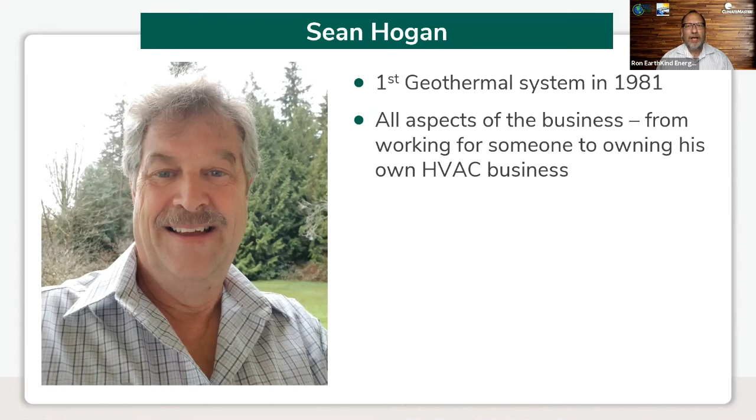Tonight, we're going to be joined by two special guests. One is Sean Hogan. Sean had one of the first geothermal systems installed in 1981. He's been involved with all aspects of the business, so you could try to stump Sean tonight if you'd be so kind with your questions in the chat function. And he's been a national trainer for ClimateMaster since 2008. He chairs the International Ground Source Heat Pump Association Training Committee, and he's a do it right or stay at home kind of guy.

In addition, tonight we have Rochester contractor Mike Seidenberg, or Eco Mike. He's been around for a long time. He's the owner of Eco Energy of New York LLC, and he services Rochester and pretty much all of Western New York from Syracuse to Buffalo. He's been a geothermal installer since 2006.

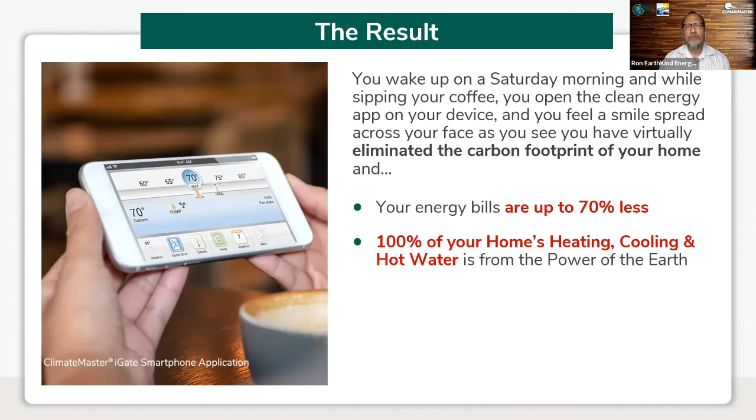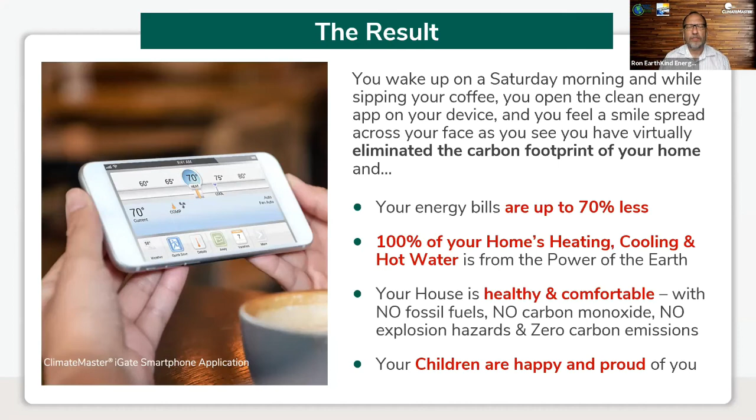You've got 100% of your home's heating, cooling, and hot water coming from the power of the earth, from the ground underneath your feet. Your house is healthy and comfortable. There's no fossil fuels, no carbon monoxide to worry about, no explosion hazards, and a zero carbon environmental footprint. And if you've got kids like I do, they're happy and proud to be associated with a family that is doing all these great things. All right, where's the proof?

So heat pumps, interesting concept, right? So everybody has a heat pump. Most of us don't realize that our refrigerator and our freezers are heat pumps. And that's because the compression and expansion cycle takes that heat out of the box and lets it go out in those coils in back or underneath that particular refrigerator or freezer.

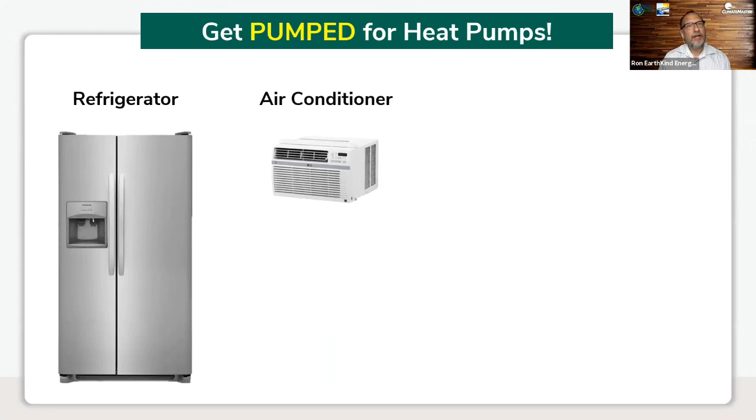We also have air conditioners. An air conditioner, whether it's one you put in your window or a central air conditioner, actually is a heat pump as well. And the only difference between an air conditioner and an air source heat pump is that an air conditioner only does this cycle during the summer, but an air source heat pump takes the same cycle, flips some valves, and takes the heat out of the air, does the compression and expansion, and then warms your home or your building during the winter.

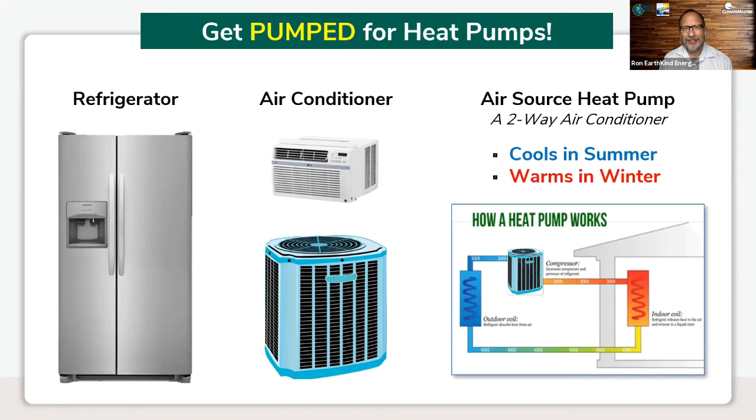And it's a compression and expansion cycle, and we can go into the technology if you'd like. So feel free to ask questions. And again, feel free to try to stump Mike and Sean. Okay, and at this, I'm going to pass it over to our guest presenter, Sean Hogan, if you would, sir.

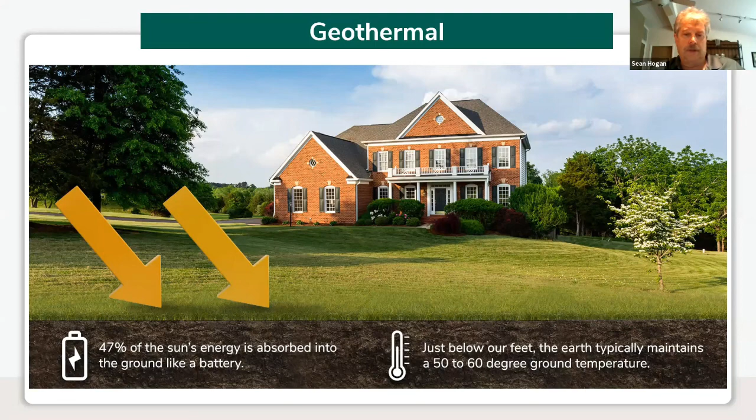So burying that pipe in whatever form it happens to take below the frost line gives you an even temperature in the winter, but also just like something we recently experienced where I live out here near the Seattle area is that when it gets blistering hot outside, your typical air source product, they struggle a bit. They lose capacity because they're trying to reject that hot indoor air into not very receptive hot outdoor air. So my heat pump just purred right along when I had 110 degrees here on Tuesday at my house, and my house was comfortable, and my bill is lovely.

So in the summertime, as you can see here, we're taking that heat out of the house and we're rejecting it into that tepid ground temperature. And up in the New York area, you're probably in the mid 50s, I would guess, low 50s, depending on your actual location. Similar out to where I live. So in the summertime, your efficiencies are very, very high because of that delta, that temperature difference from that cool ground to what you're trying to reject out of the home. So it's very receptive. It's extremely effective.

And the same in the winter. We're going to reverse that refrigerant cycle and we're going to draw that constant temperature. And a lot of people say, how in the world do you do that with 55 degree ground? And it's because of the refrigeration process. I won't get into that. That's more of a technical question when you sit down with someone that's going to design your system. But why is it an advantage?

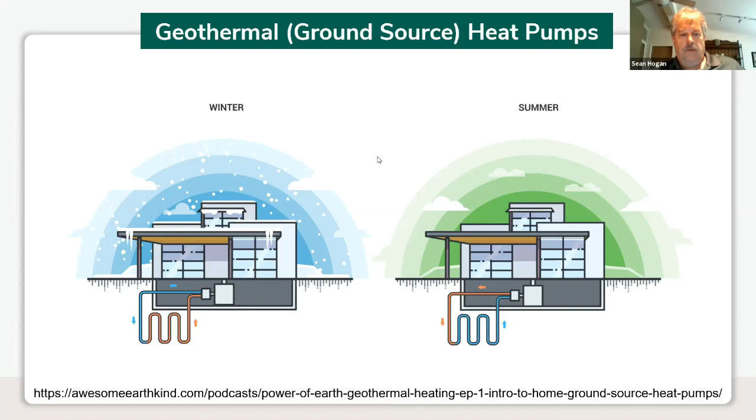Because that earth temperature doesn't tend to get much affected by what's going on outside. The other thing that I want to point out is that when you have your typical air source heat pumps, you have a unit that's sitting outside. They make noise. You're typically landscaping around them to make them go away, but also the most efficient they are is the day you put them in, because they're outside. They're going to start to degrade with dirt, leaves, pine needles over time. And if you're near the ocean, well, they really degrade because of the salt sea air.

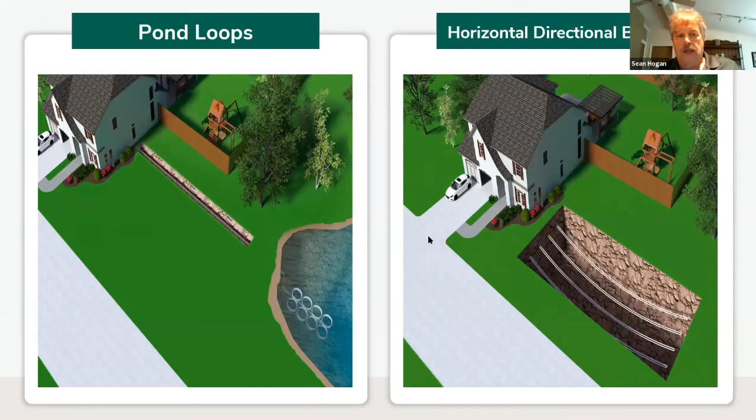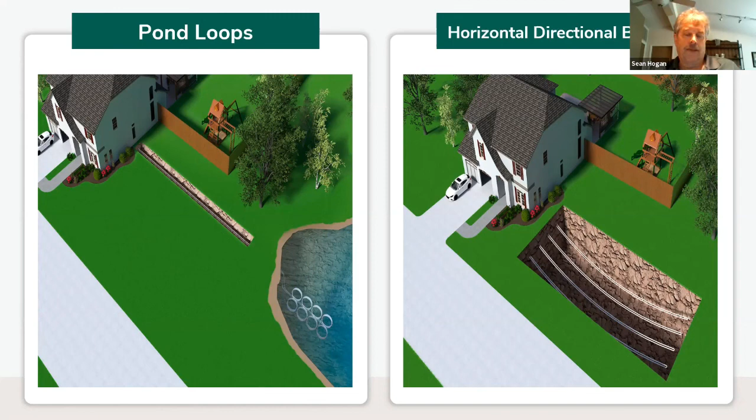So here's a couple of applications, and it doesn't matter which one you use. They all work the same if sized, designed, and installed properly. It all comes down to how much property do you have and what equipment is required. So you can do a horizontal trench system. You can do the vertical bore. If you happen to have access to a body of water that has the correct size and depth, that's outstanding for a geothermal heat pump. Or you can do what's called directional boring, which allows you to go underneath items that typically would mean that that area is not available for a typical trench ground loop. So that's a really nice method if that's what you have to utilize to get that loop field in.

Thank you so much, Sean.

One of the big advantages of geothermal as well is the fact that you can get a 26% tax credit on the total cost of your system. So when you take a look at the federal tax credits, always talk to your tax advisor, because everyone's situation is a little bit different. Talk to your tax advisor and confirm that you're able to take advantage of this. But if you pay federal taxes, you should be able to take 26%, a quarter of the system's cost, and write it off and get it back in a tax credit for a qualified geothermal heat pump cost. And that's not the same, by the way, for an air source. So it's one of the additional benefits that you get with a geothermal heat pump.

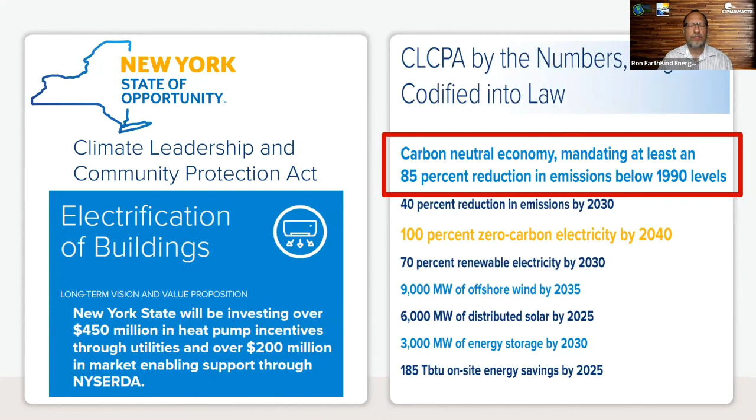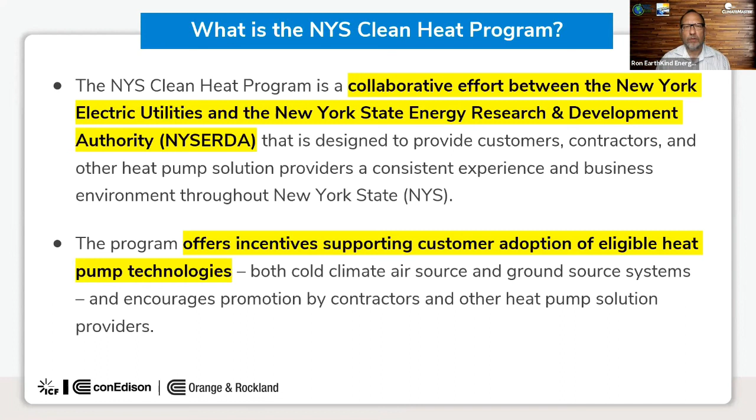In New York State, we have something called the Climate Leadership and Community Protection Act that got passed in 2019. And what that does is it basically starts to move towards electrifying all our buildings to get rid of all the fossil fuels that are around, so that we have a carbon neutral economy by 2050. And New York State is investing $450 million in heat pump incentives that are available to you to help make this technology change. And so, what is the Clean Heat Program from New York State? It's a collaborative effort, actually, between the utilities and the New York State Energy Research and Development Authority. And basically, it offers incentives to help write down the cost and make it much more affordable for you in the upfront cost, so that you can save more money over the long term. And in Rochester Gas and Electric, the average incentive for a home is $7,500.

But Eco Mike, if you would come on and tell them what you figured out today from your hard work to get RG&E to recognize some differences in the program. Well, on this one specific unit, the Trilogy, which does your heating, cooling, and domestic hot water, it actually maximizes the incentives. If you have a 5-ton unit, it'll get you over $10,000 in rebates. $10,000 right off the top, right, Mike? Right off the top. So that goes to you. Your homeowner never pays it, and then the homeowner just takes an additional 26% federal tax credit. So 10 grand off the top plus another 26%, and boy, makes it really affordable.

Thanks, Mike. Thank you. All right.

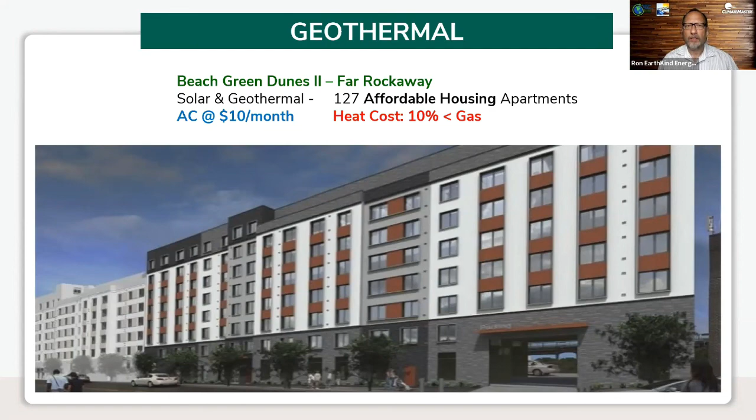So just to give you a sense, a lot of folks think this technology is just for homes, but this is one example of a multifamily building. There's a lot of examples of commercial buildings of all different sizes, but in this particular multifamily building, they combined solar, which is a great option when you can do it, with geothermal. And what happens with geothermal is that it's cheaper in this multifamily building than natural gas for heating, and it's dramatically cheaper for air conditioning. Some people in this area of the state are paying $100 a month for air conditioning for the same size units, and now it's down to $10 a month in this affordable housing complex down in the Rockaways. But the great thing about this technology is that it works no matter what kind of home you have.

If you have a small plot of land, if you have a ranch, if you have a McMansion, if you have a lot of land, no matter what type of property, what type of house you have, most likely you can use this technology to help you reduce your energy costs very substantially. We're going to talk exactly how much that's going to be.

But the wonderful thing is that before, you might have noticed prices going up again with oil and propane and other sources of energy. So you're getting shocking bills, rising energy rates, looking at 2,000 pounds of carbon, a ton of carbon per household per year is the average when we use fossil fuels. You have no control, or very little control over your energy future. If you're like me, your kids are getting worried about what's happening with the environment.

And the great part about doing these technologies is that you start to shock proof your bills so that your bills become controllable. You get up to a 70% reduction in your heating, hot water, and cooling costs. Zero carbon emissions coming from your heating system. So knocking down a ton of carbon per household per year. You feel like you're doing your part to make a difference, and your kids and your grandkids are proud of you.

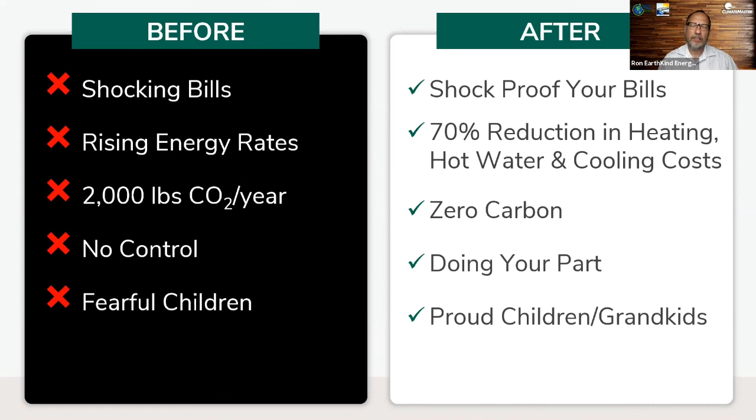And all that without having to figure it all out by yourself, to rely just on salespeople for information, to be unsure about what you're doing, to get lost in the technicalities, to be overwhelmed by the complexities, to not realize how you can save money with the incentives and the financing, or feel like you're leaving money on the table, or choosing the wrong technology and having to handle all these problems by yourself. So that at the end of the program, the simplest part is that you just choose your path and you have a positive impact and help save the planet.

All right, so now to the ClimateMaster Geothermal software system and why it's so important to have a system that optimizes your efficiency and makes sure that you know what you're getting and what you're getting into and how it compares to everything else. And at this point, I'm going to pass it back to Sean.

Yeah, thanks again, Ron. So ClimateMaster developed a GeoDesigner software system, and it truly is a tool as I look at it. I use it as much as a design tool as I do a diagnostic tool. I can go into troubled systems and model things, and I can kind of start to dig into, if there's an issue, what that might be, because, you know, they always blame the ground loop. I will tell you it's almost never the ground loop.

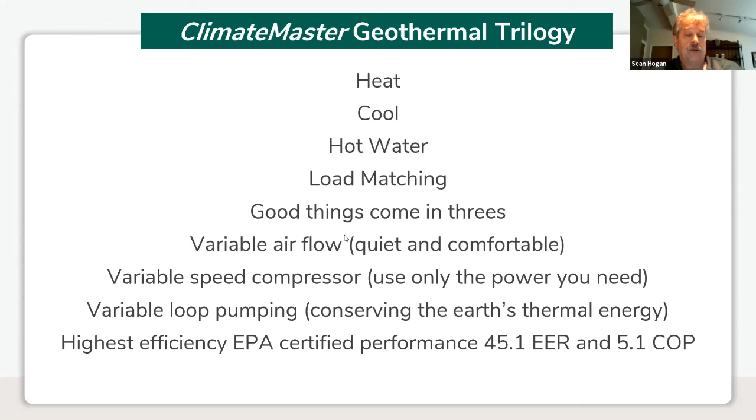I don't know if any of you were aware what the news was like out west, but I live out near Seattle, about an hour north and east of Seattle, and we had very, very high temperatures this week. Very, very unusual for us, especially in June. Well, my unit kept right up. I got calls, because I'm still in the HVAC business, of people that were struggling to maintain temperatures below 80 degrees in their home.

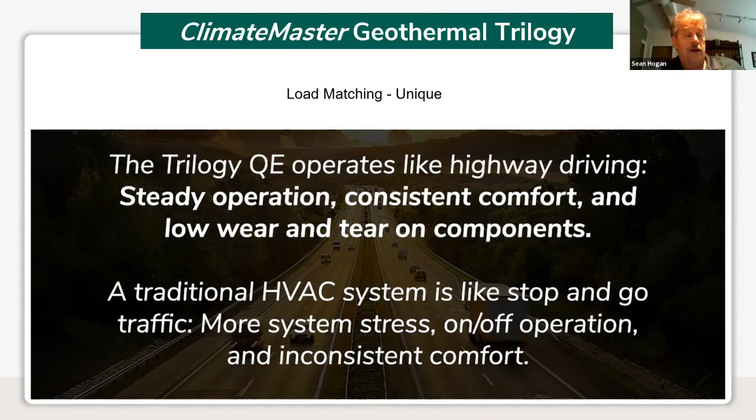Why is that? Well, their air conditioner, their heat pump, was trying to reject that heat out of their home into that hot outdoor air. It loses capacity. My geothermal heat pump was coupled with a bunch of pipe in my ground. Yeah, my ground loop temperature, the fluid in it, raised a little bit, but my efficiencies were still staggering. And my compressor ramped up to maintain that comfort, and it brought a little additional fan. So my unit ran a lot, like all of ours did out here.

But also what it did during that time is if I did much in the way of hot water usage, what the Trilogy unit does is it'll shut off that ground loop pump and no longer reject the heat in the ground, but it'll reject that heat into your hot water tank. So folks, that is either free cooling or free hot water, your choice. But I don't know about you, I like free. I already own it. So now it's paying me back in spades.

So it truly is making lemonade from lemons. So probably not a good analogy with a heat pump, but great unit. I really think that this is just a super product because, well, I've been living with it for 7 years, and all I do is I keep my filter clean.

So here's a couple of instances where the unit is sitting in a smaller space like a closet, mechanical room, and you can pipe it over to where the hot water tank is. Here's a garage installation. I've done quite a few of these where the heat pump is right next to the smart tank. Very clean, by the way. So here's the smart tank.

The smart tank is made for us. It's a highly, highly insulated tank. It has about 2.5 inches of foam insulation in every direction. That includes the top and the bottom. It's in 3 different sizes. It's custom designed to meet our needs. It communicates with the heat pump. So this isn't a system that just throws a little bit of free hot water in the tank while it's heating and cooling your home.

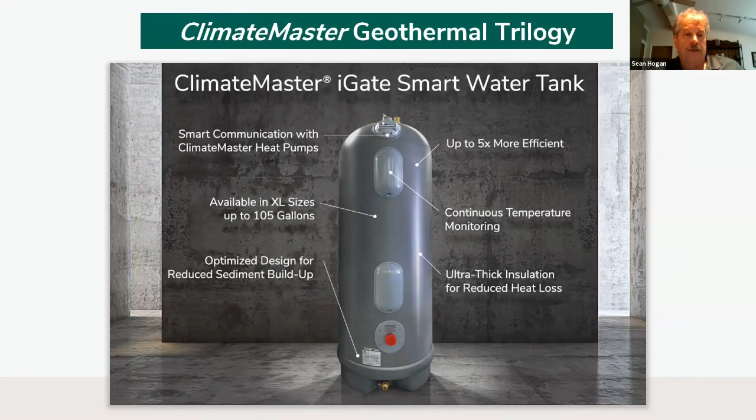The QE45 is going to react to the hot water tank. It's full on hot water production, does 100% of your hot water. I have actually never turned the backup elements on in my tank in 7 years. So it's a super system. It does a terrific job at high efficiencies. And during power outages, sometimes I'm without power out where I live 2 to 3 days. When the power comes back on, I lost maybe 3 degrees in that tank. It's just a thermos bottle beyond measure.

It's amazing. We also have a proprietary control system, and we're about to take a quantum leap to another, even more improved. But this is state of the art. So this is all Wi-Fi based. There's apps for the homeowner as well as the contractor, both for the computer but also the smartphone. It's a Wi-Fi enabled thermostat. The homeowner can actually change the temperatures remotely via the thermostat.

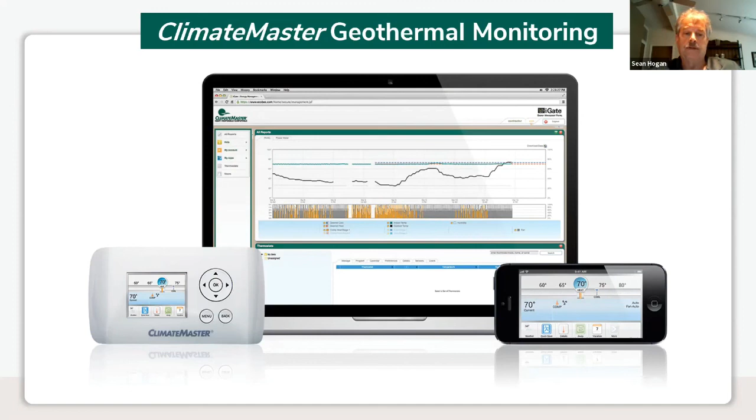I will say this right up front, folks, please don't use setback with your geothermal heat pumps. You won't save a penny. In fact, it'll cost you. So I keep mine set 24/7 and I don't touch it, because that maximizes the savings.

So here's some of the application. I think you saw this a little bit earlier. One of the things that was talked about briefly by me is that you don't have units sitting outside in the elements. You're not trying to disguise the noise. You're not trying to limit the distance away from the windows and those locations. It also means that if there's any service needing to be done at the heat pump, well, that's all done inside the home, whether it's in that mechanical room or garage. It's very easy. It's very compact.

I will tell you that all I do with my geothermal heat pump, I just keep the filter clean. There's nothing to oil. There's not a lot to do. They truly are the least cost and longest lived heat pump out there. Folks, I have geothermal heat pumps that I installed over 30 years ago out there and just motoring along just fine. Not many can say that about unitary outdoor air source product, whether it's air conditioners or heat pumps.

So getting into the software, number one is you want to analyze. Number two is plan. And then execute. One of the most crucial parts about the beginning of any HVAC system is: is this home a heat pump candidate? In other words, will it retain the comfort? Guys, if the wind blows outside and your curtains move inside, you may not be a heat pump candidate. You may want to address those issues before you take this step into the next energy saving component into your home. So it all starts with a load calculation, and this is critical.

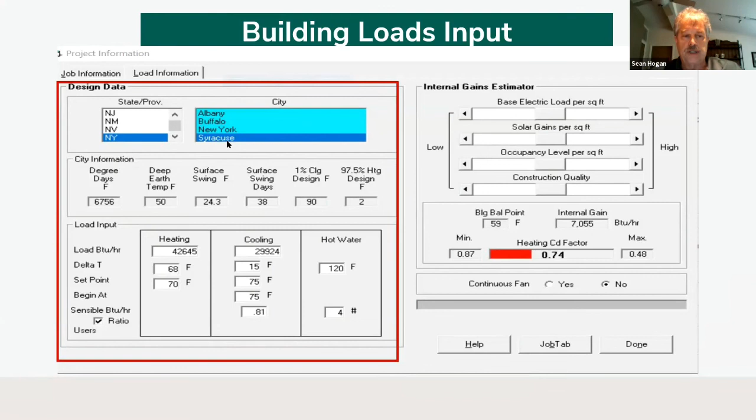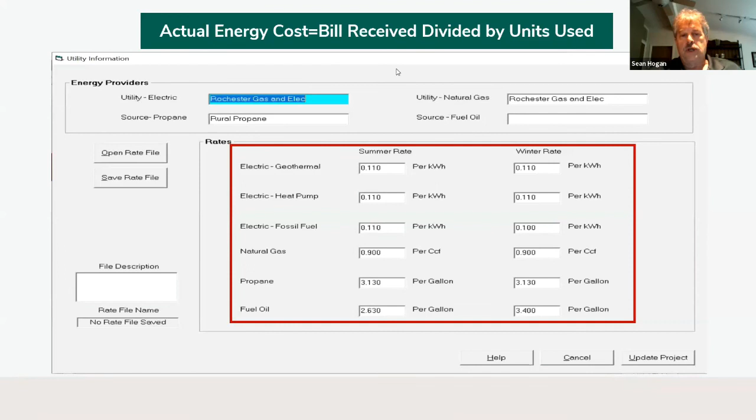It's not a rule of thumb. It's not how many square feet do you have. It's measurements of the home, the windows, the doors, the insulation values for your weather city. And then the contractor will put all of that into the software, that load calculation. Also, the contractor, EcoMike, for example, will have the ability to create a rate file. This is where you can determine what the fuel costs and electricity costs, and if they change summer to winter, you can put those in there because you can test drive the system. You can get an idea what you would pay using other products versus the QE45 or another geothermal product. And I will tell you, it's reasonably accurate.

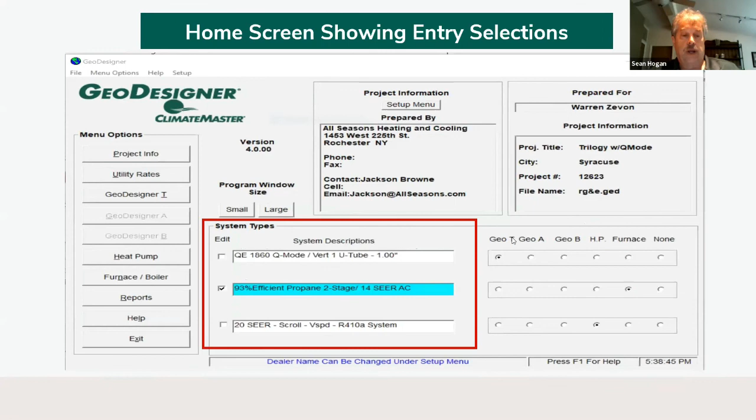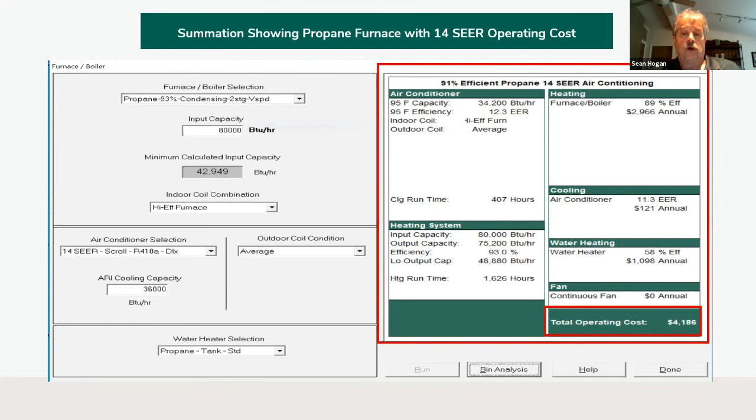It's pretty good. The ability to show you by comparison the geothermal to, in this case, propane and air conditioning, and then an air-to-air heat pump, a very high SEER air-to-air heat pump. So right over here, we're going to show you that in this example, it's a condensing gas furnace, air conditioner, sizing, and it shows you what your annual operating costs are based on the utility rates that you've already created. You're over $4,000 a year, up in that neighborhood, for that size of a system.

Here we have the QE 1860. One of the things that's really beautiful about this unit is that the 1860 is 18,000 to 60,000 BTUs, and you can limit it. In other words, EcoMike can come in there and say, you know what, I don't want 60,000 BTUs. The house doesn't need that. I'm going to limit it to 42 in cooling and 48 in heating. This is important because not all homes have an even balance of heating and cooling, especially up in the Northeast. This allows you to dial in that comfort, whereas you're oversized in one to the other if you're trying to make sure that you have all those capacities met. So this allows you to dial that in.

Why do we do that? Well, it gives you elbow room for those cases like I just experienced where we had unheard of temperatures for 5 days out here. If I had short looped it, in other words, I said, I'm going to go down to 25 degrees or I'm going to go up to 100 degrees, it would have affected my capacity, the performance, and it might have affected my comfort level. So that is an important component of making sure that you, the homeowner, get what your expectations are: good energy savings and comfort in those conditions. And the QE45 can deliver it as long as you provided for the duct delivery system and the ground loop.

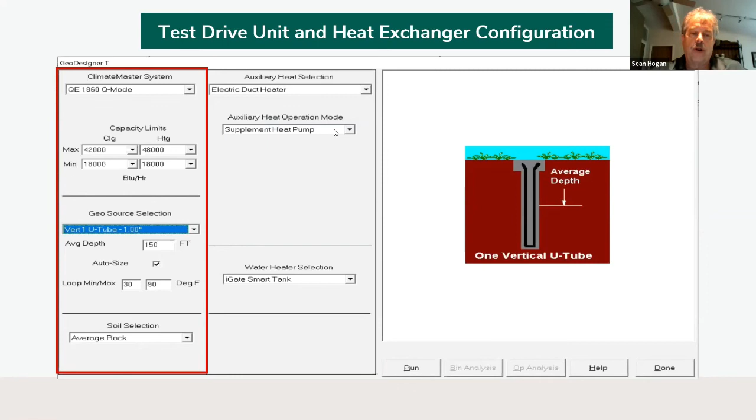So here we're showing that you have the smart tank. That's the only one you can check with the QE45. And, by comparison, let me move this little picture box here. By comparison, that same house with a QE45 and 615 feet of vertical bore loop, that same house costs $750.

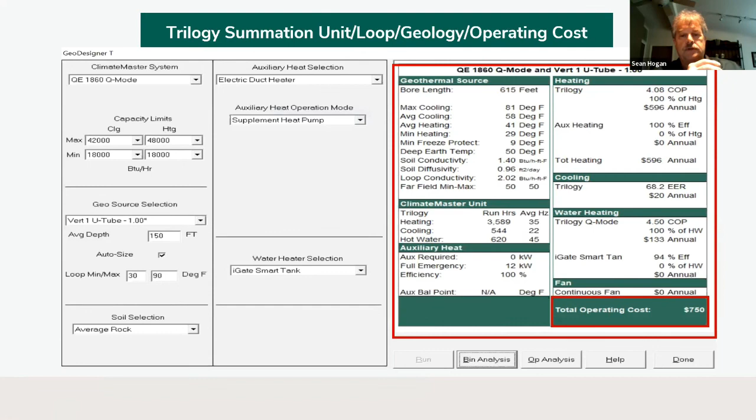That's really hard to beat. You know, when you start to line up those cost differences, the decision making becomes really, really easy. So here in the report, you can see it breaks down those three system costs: heating, cooling, hot water. This is based on the number of people in the home, but also what is the total cost, and then it breaks it down into a monthly cost, because a lot of us, well, we're payment buyers. If we need to do some financing, this becomes real easy. The other aspect, what incentives do to that bottom line as well, and that really starts to drive this down.

So I can't say enough about the QE45. And by the way, that ground loop, that's 100-year pipe. No one on this podcast is going to ever see the end of the life of the pipe that we use. So it's a system that's here to stay.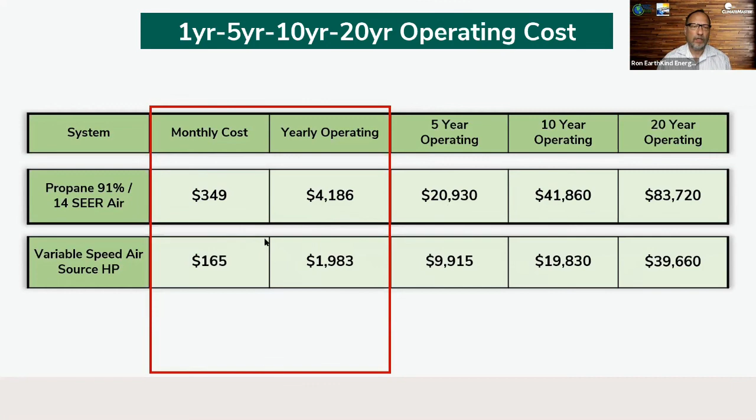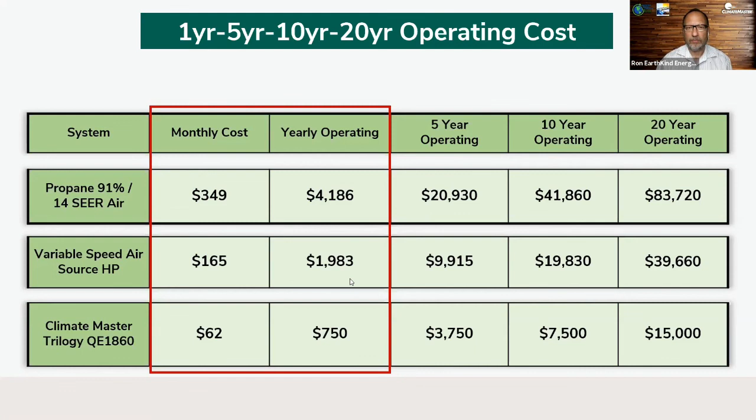But the great thing is that when you've got the geothermal and it's supplying all your heat, hot water, and air conditioning, your monthly cost is going down to about $60 a month, $750 a year. You start adding up the operating costs over 5 years, 10 years, however long you're figuring that you're going to be in that home. And boy, the savings add up to dramatic. I mean, you could buy a couple of cars for the amount of savings that you're going to have over the next couple of years. So pretty substantial.

And the great part as well now is that there's financing, right? So there's loans. One of the package loans is up to $50,000. You can get extended fixed rate terms for 2 to 20 years. Rates anywhere from 3 to 9% annual, depending upon your credit history and how long you're going out, et cetera. You can do no interest. Defer your payments for 6, 12, or 18 months. So if you're waiting for that 26% federal tax credit, you can have a loan with no interest. And then once your tax credit check comes back, boom, pay it off and you're good.

And you can also do equal payments on various different levels. And the nice part as well is it's not a hit on your credit report until after you do the financing. So when you're figuring everything out, no hits on your credit report if you decide not to go forward for whatever reason. So some great options, and definitely check out all the options with your contractor to make sure you get the one that works right with you.

All right, so if by chance you are ready to implement the next steps, what you need to know is, first, book a free assessment. Let somebody come out. Eco Mike, if you're in his territory, or another contractor, and make sure they model your house. They do a load calculation. They identify, based on your house, how much energy you're losing in various different pieces, and do an assessment that compares what your current costs are and what the cost will be with either this system, or if you're looking at something else, let them model that too. So you see what the total cost is going to be.